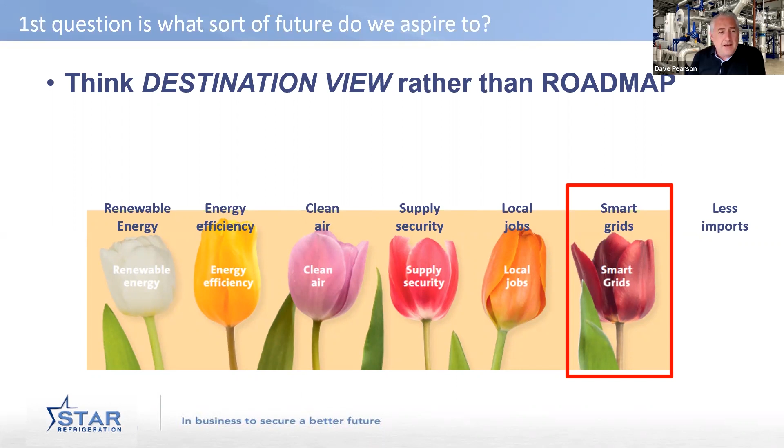But that's the challenge of how to bring this technique into all these different places. And clearly, one of the key things we want to do is do it as cost effectively as possible. You can do anything well or badly, as the case may be.

Sorry, the clicking is just going a little bit slow here.

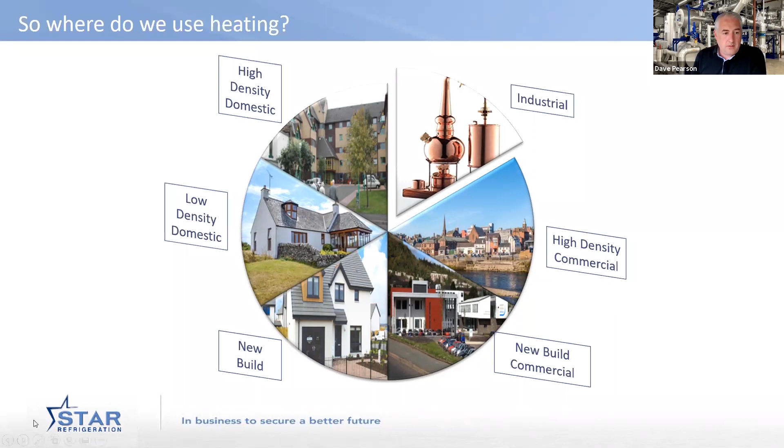Here we go. So some folk have heard of heat pumps. I've got this in the style of Vic Reeves' statistic that 50% of the world have heard of heat pumps, and 50% have heard that they don't work very well. But that's something that we're trying to dispel. Taking a very simple one, and this just is really there to demonstrate that policy is at the core of the challenge and the opportunity.

So Star's bit, though, is very different from that. We're not in domestic heat pumps. I happen to have one in my house, but that's just because I'm a bit of a heat pump geek. And it's, I have to say, running very well. But our business got into heat pumps around about 2008, 2009.

Some clients approached us and said, we're thinking of doing this project in Norway for district heating. And my first comment was, what's district heating? I'd never heard of it, to be perfectly honest. So we got involved in it. We realized that if we used ammonia as the working fluid, we outgunned the competition using cousins of CFCs, basically, by about 25%. So this client is now buying 25% less electricity because they used an ammonia heat pump.

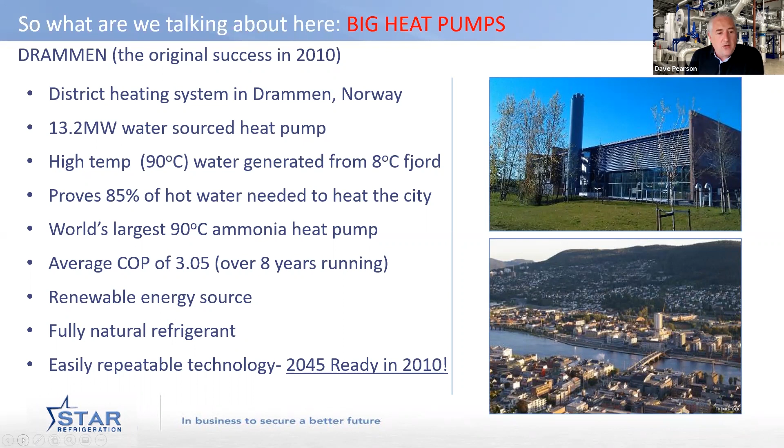We also had the challenge of getting up to a fairly high temperature. And this was the first 90-degree heat pump in the world. It's still the largest 90-degree heat pump even 10 years later. And that says lots of things. A, it was good, and B, gosh, it's quite difficult to repeat success. So it's taken us a while, but we have moved forward and much closer to home.

West Dunbartonshire Council and the area of Clydebank. This is the former John Brown shipyard area that's being redeveloped over the next few years, but they have deployed effectively something similar to Drammen. We're taking the heat from the River Clyde and raising that up to 80 degrees and delivering heat into the district heating network that will feed the entire area.

The buildings will not be served with gas, I don't think, and they'll be getting their heat from that. But you know, why bother? Well, when I put this slide together, I said it's roughly about 45% of the carbon footprint of gas.

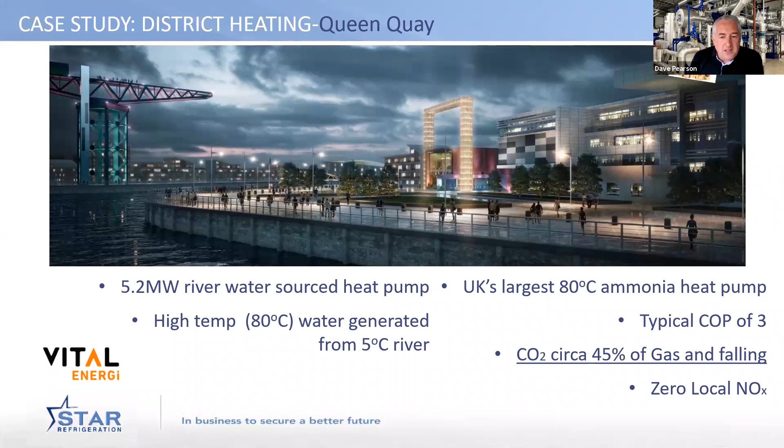Actually, on some days it can be 2%, because obviously the Scottish grid is incredibly decarbonised. And so the site is built. This is quite an old photo, actually. I should pop down and get some nice new ones, because it's all been landscaped. It's a lovely plaza.

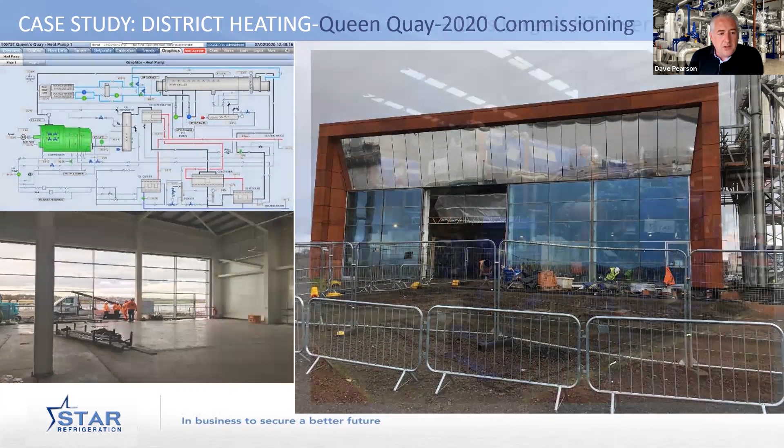The lower left corner, sorry, is before the heat pumps even went into the facility, and there's space for 4 heat pumps, and 2 have been installed. So these are what I affectionately call the twins. I kind of felt we were rearing them in the factory in Thornliebank in Glasgow, and then they were passed over to their new owners, and we're very proud that that's happened.

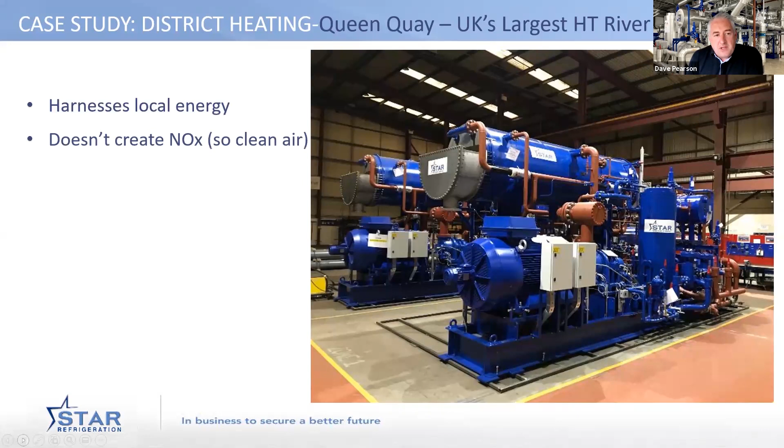And Vital Energi are the main contractor on the site, and did a brilliant job of quite literally picking these up and taking them and deploying them. And the key thing about the district heating is the other bits, and really it's the other bits I want to talk about today. But these particular ones, there is no NOx emissions, because they're not burning anything. Obviously created local jobs. The key thing, and this is really the pertinence of today, it actually allows more wind generation on the grid, because we have a very flexible consumer.

In the foreground of this photo, you can see the electric motor. These are each 800 kilowatts of electric motors. Now that in one sense is a challenge, because it's a big electrical cable and it's a big load. But in the other sense, it's a huge opportunity, because we can switch the heat pumps off in less than a second. And that's the bit I'll come on to in a bit more detail.

We haven't as yet harnessed the cooling effect, but these heat pumps are cooling down river water, and that is not being used. We're only keeping the heat from the river water that's boosted up to 80 degrees. So perhaps at some point somebody will ask for some cooling on the site. We can flex around the time of use and aim for the cheapest tariff. And once things settle down in site, that's, I'm sure, something that they'll be looking at. But as I said, we're delivering 3 units of heat for every 1 unit of electricity.

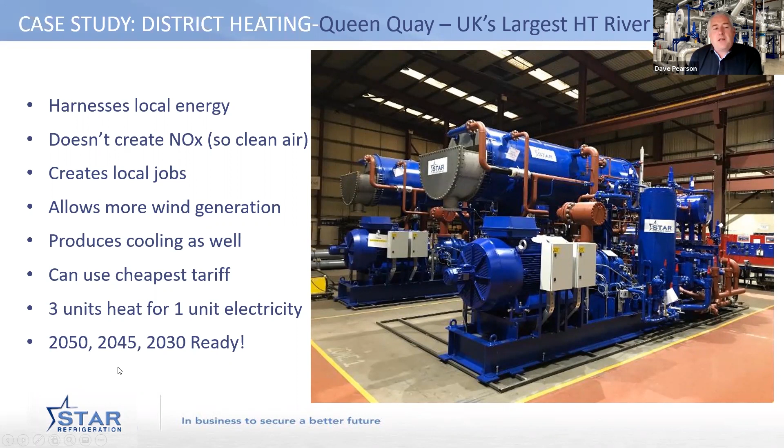And depending what date you take, and there's a real cluster of dates being thrown around, but these units are 2050 ready, if that's the date you're picking. Or in Scotland, of course, we've got targets for 2045, or various cities now are saying we need to be 2030 ready. We will not have to go back and revisit these and run them on a different fuel, or make them do something different. We are producing heat that is 2030 ready, and that started tail end of last year. So 10 years ahead of schedule, so well done to them.

So the key bit about this is energy storage, and there's some brilliant guys in this industry, very inspired by Henrik Lund and his colleagues, in particular David Connolly and Brian Vad Mathiesen. But if you're interested in any form of energy storage, look them up. They're in Aalborg University in Denmark. I learned a lot from them over the years. And one of the things we learned was that energy storage is incredibly important. And you can do it different ways.

You might have a Tesla battery, and that's great, but you can see in the left-hand column, the y-axis, the cost. Or you might have a large-scale battery facility, and that's great, but it costs that much. Or a variety of others. Closer to home, pumped hydro is clearly a technique that we know in Scotland. But what the guys in Aalborg are saying is, actually, if you're going to turn that electricity into heat anyway, storing it as heat is a far better way of doing it.

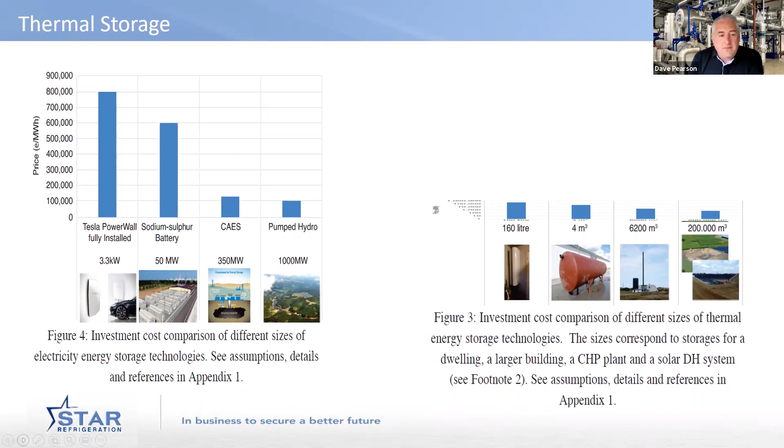So at a very domestic level, a small tank in a house will cost you this much. A larger tank will cost you that much, and it's cheaper. And then the sort of centralized district heating, and even in Denmark some of the cities now have effectively a football pitch sized thermal store. We don't have that in Clydebank as yet, but if I put these to the same scale, of course, that's the comparative cost. So you can see it's very, very much cheaper to store heat as a thermal component, a thermal vector, than storing as electricity.

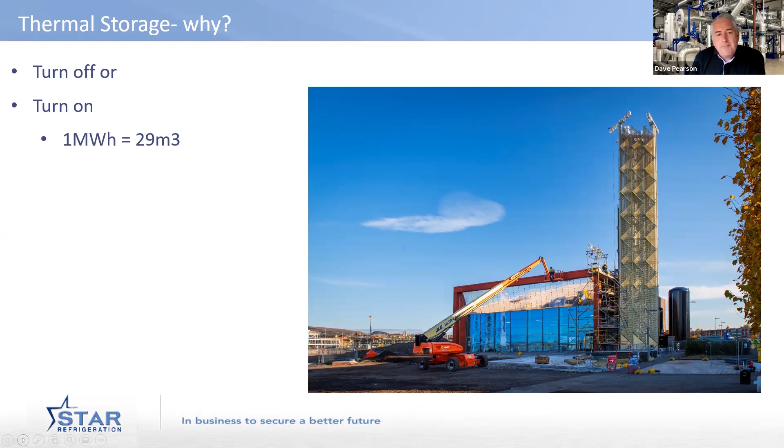So thermal storage, why is the question? Well, we can forcibly turn on the heat pumps, even if we don't need heat, and store the heat. Or we can forcibly turn them off. If we've already got a thermal store, we can turn the heat pumps off and save it. But just how valuable is that? Well, 1 megawatt hour of heat storage needs 29 cubic meters. 1 kilowatt hour is 29 liters, therefore, and 1 cubic meter gives us 11.5 kilowatt hours of electricity that we can switch on or switch off.

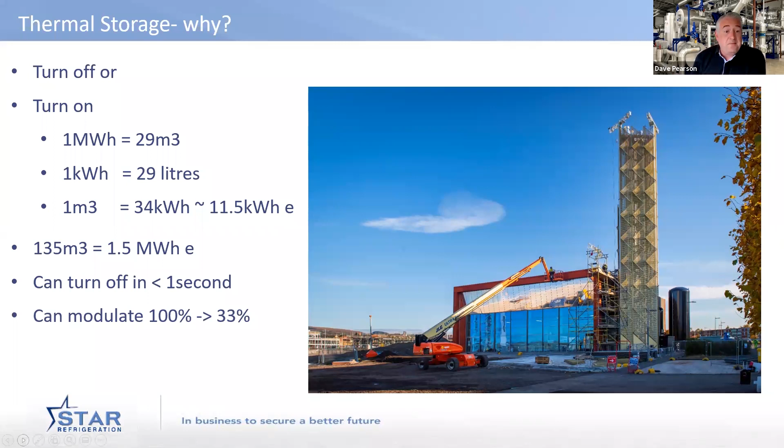And we have 135 cubic meters in that tank. You can see, much like the Father Ted sketch of these ones are small and those ones are far away. That tank is absolutely gigantic, but quite far away. So that's giving us 1.5 megawatt hours of electrical switching that we can enact when we choose. As I said earlier, we can turn it off in less than a second. And we can also control the demand output and trim down to about 33% capacity.

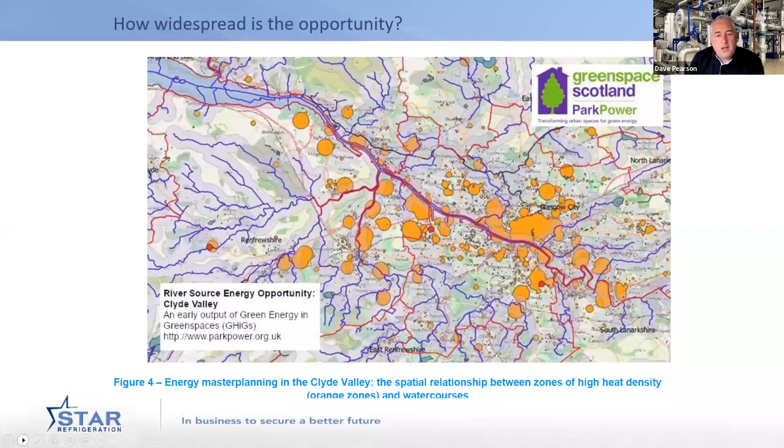So is this just a freak case? You know, we're only ever going to see one of these systems in Scotland. Well, that's a policy decision. It's down to whether we create the right political environment and the policy. And there's some really good stuff coming through that's picking up on this success and going forwards. But what about the technical aspects? Well, this is some really good work done by Greenspace Scotland and Park Power, basically showing clusters of heat demand and the proximity to water, and where these could be picked up and delivered, and effectively cousins of Queen Quay created.

We did some work under the banner of Heat Vision 2030 for the centre of Glasgow, and basically said, if we create heat networks with 4 heat pumps, a bit like the Twins, then could we create district heating across the centre of Glasgow? And the short answer is absolutely yes. The technology is 100% proven. What we need is a commercial platform in which to do that. And that's why the private wire is so incredibly important in this, and also the flexibility.

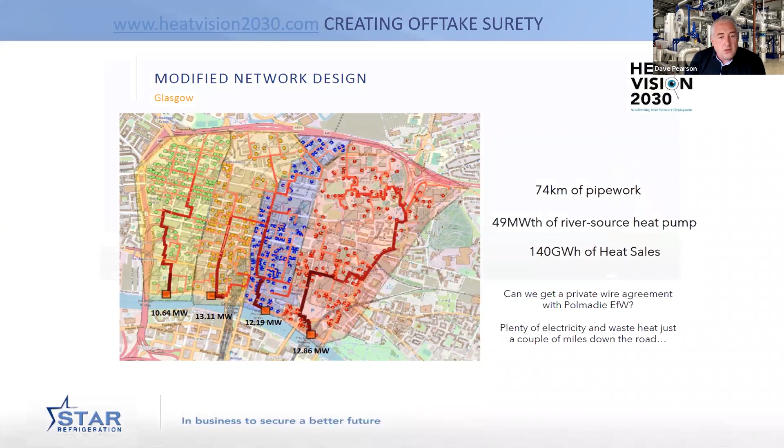So with that, and as intro to the next speaker, Alastair, and to try and big him up, really what I'm saying is, in the words of that other philosopher of our modern time, Norman Cook, heat, flex, save, repeat. So Alastair, I'll pass over to you.

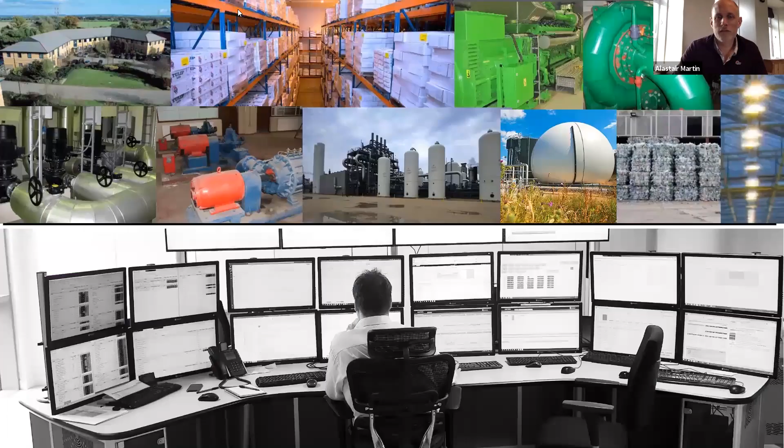Thank you very much. I've never seen anybody bring Fatboy Slim and a log scale graph into the same presentation, so that's an achievement. Thank you for that. And Andrew, I think you're going to advance the slides for me.

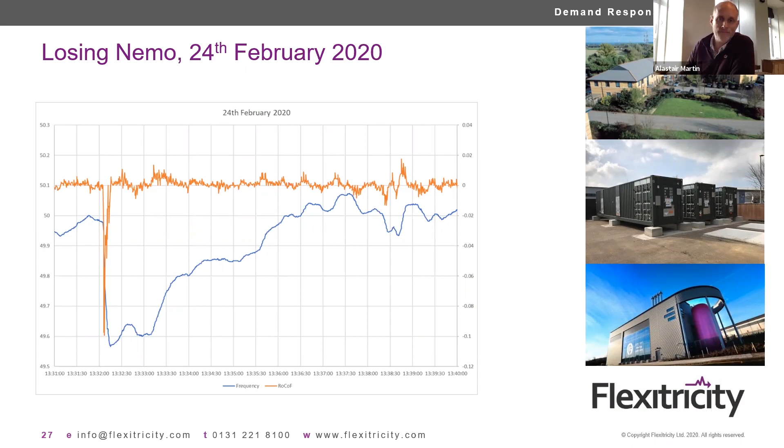These events still occur, but with the grid greening up, the demand side has new duties on top, and that's balancing the natural ebbs and flows of renewable electricity. And here, much of what happens more slowly over minutes and hours. And it's not all about shortfall. During the Beast from the East, we saw about 28% of GB electricity coming from wind. And solar can do well as well, even in winter.

These graphs are all from a recent bunch of Christmas days, showing solar output in those times. And the highest of the lot is higher in output than Hinkley C nuclear power station will be able to produce when it's commissioned. So renewables can be very high. These are situations when demand is also fairly high, but renewables can be high when demand is low. And they can also vary. So other times there is less renewable energy available.

These changes have a large effect on electricity prices. Now, I'm not talking about tariffs there. I'm talking about the wholesale and the spot markets and the balancing mechanism, the markets that underlie the tariff prices. So prices change a lot. And the closer to real time you are or able to act, the more certain you can be about whether a price is high or low and whether or not you can respond to that and capture the value of it.

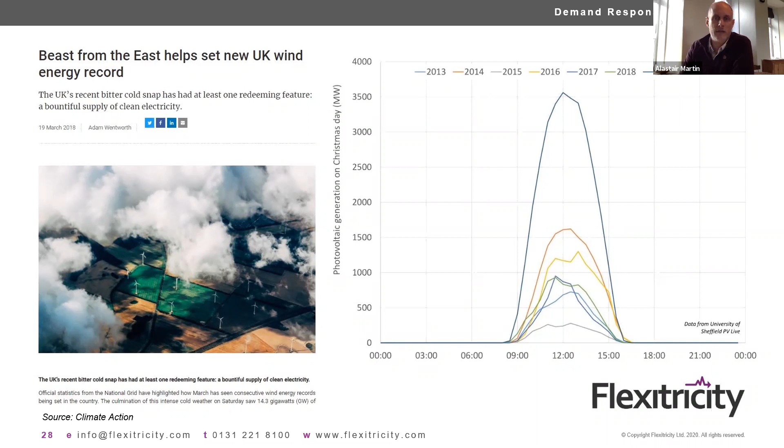There's another point, which is that it is often windy in Scotland. And there's a lot of solar generation across southern England and South Wales. And sometimes the networks can't carry everything that we want to flow. So some of it gets wasted, and that's expensive. And all of that, if you can jump a slide, has profound implications for heat.

As Dave has said, heat can be stored far more cheaply than electricity, and it's usually much better at handling short variations in feed and supply. So the pictures here are all of well-known CHP schemes. And I'm not going to speculate on what the individual plans of the operators of these schemes may be, but we all know what decarbonisation means for most heat networks. And that is a move to large-scale heat pumps.

So if you're in the business of turning electricity into heat, the call to you from me is to recognise the value in the way that you do that by operating flexibly. All heat networks have some inertia, most have heat storage, some have a lot, and all of that has value. Some of the things that electricity wants from flexibility are technically challenging, and some are subject to strict rules, or they're just really fast. But not everything is like that.

I sometimes come across energy managers and other energy professionals who have heard one particular demand flexibility pitch. They have determined that their assets can't do that particular pitch, and they've abandoned the whole idea. Now we want to avoid that sort of missed opportunity. So the way I think most heat pumps should operate is on the next slide.

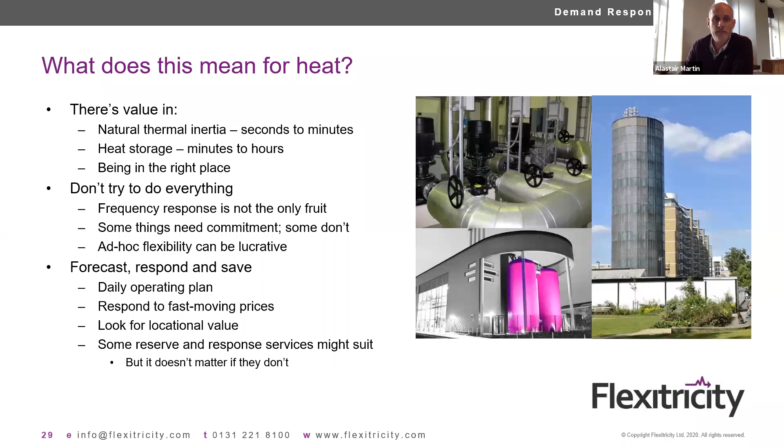It starts with capacity, the capacity to consume electricity or to not consume, an appraisal of whether or not any of the contracted balancing services like frequency response or reserve could be offered, and if so, how much and when. And that generally means a commitment of some kind from 1 to 30 days ahead.

Then it's all about setting up the daily operating plan with a mixture of forward or curve trades and day-ahead auctions. This then sets up what the heat pump is intending to do if nothing else changes. But this can be changed right up to real time through the intraday markets and the balancing mechanism, as you see on the right, as we vary the schedule to suit the change in prices and the needs of electricity.

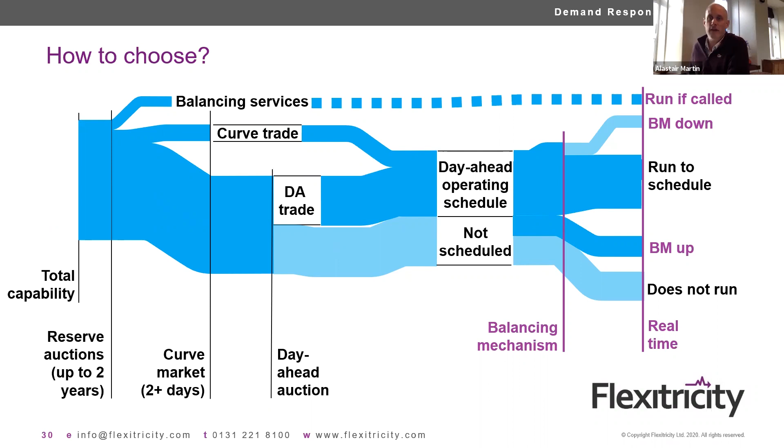And that is where much of the value of flexibility is created. So the next slide shows the balancing mechanism. We're going to show a couple of example periods in the balancing mechanism. In the balancing mechanism, anyone who signed up to it can trade, but they can only trade with National Grid. National Grid is the counterparty.

And the BM, the balancing mechanism, is split into the bid stack on the left, that's people willing to buy energy, and the offer stack on the right, people willing to sell it. And selling can mean turning down consumption. So the green ones here are BM trades, or BOAs, as they're called, which were made in that half hour. Some of ours are circled, and one at least of those is a district energy scheme.

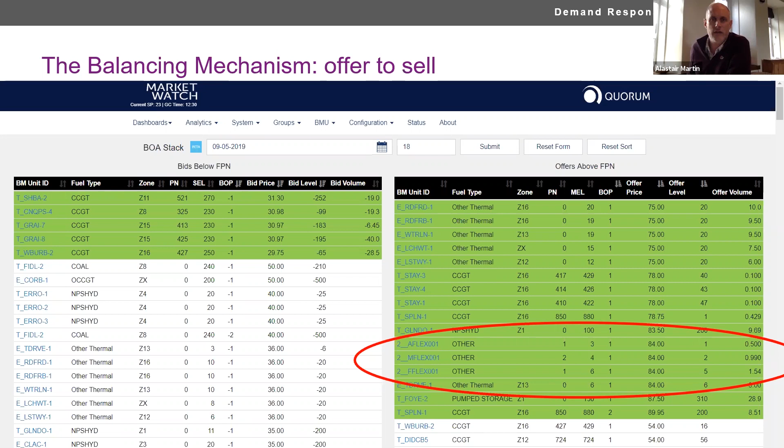Next slide shows the opposite. So another period when Grid was trying to get rid of energy. The circled trades are actually our customers getting paid to stop generating. And in fact, in there is district energy that's getting paid essentially to rely on its heat storage. That's a great moment, clearly, to start a heat pump.

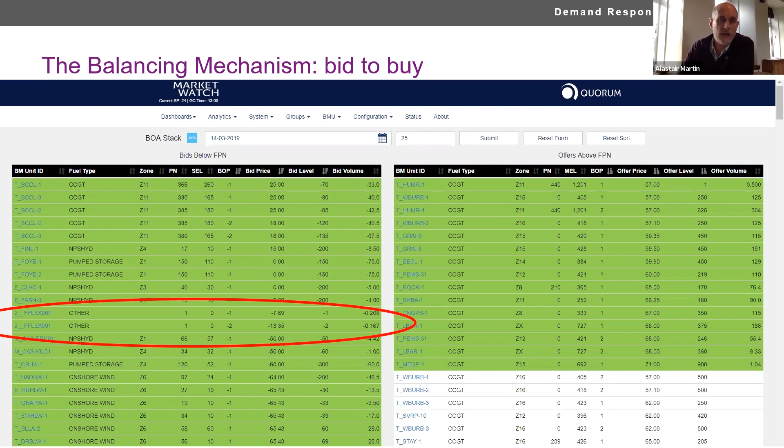But the BM also carries a true locational element, which most electricity markets don't. So if you're near the renewable generators and the transmission network is highly loaded, you will get called out of the regular price order. This is one such period. The green list on the left goes way off the page, with ever increasing negative prices achieved, in this case, mainly by wind farms in Scotland. So I'm a great believer in putting green energy to work, and I want to see heat pumps soaking up that energy. Next slide, Andrew.

So these markets, the BM in particular, they can be very active. The BM sees thousands of trades each day. This shows 1 day of CHP activity in district energy. The red line is what the energy centre planned to do. The black lines show extra energy bought in the balancing mechanism, all of which are within the limits of the site, which are the blue lines, and those limits can change operationally at any time. And every day is different. Some are quiet, some are busy. It all depends on the day and on the plant itself.

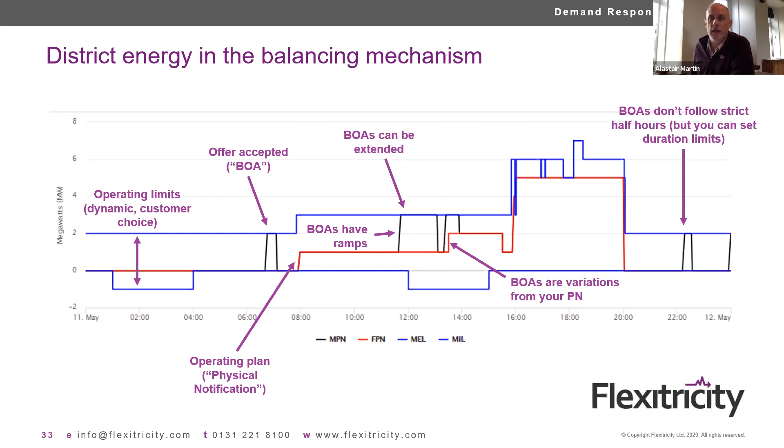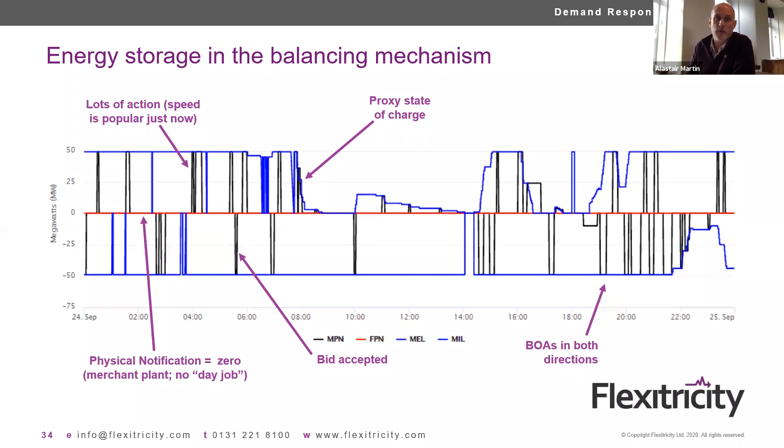What we're doing is moving electricity around in time. We're responding to events and to opportunities, all within the constraint of the heat network itself. Optimization means meeting heat demand at lowest cost, and that means we'll be using green energy to warm people's homes, and that is what we're for.

But many of the markets, the balancing mechanism, intraday, day ahead, they require an electricity supply license to access. So we've been a licensed supplier for 3 years now, concentrating on flexible business customers. Some of these things are now offered by other suppliers, but it's not the norm. Most electricity users aren't thinking about flexibility, so most suppliers don't concentrate on flexibility.

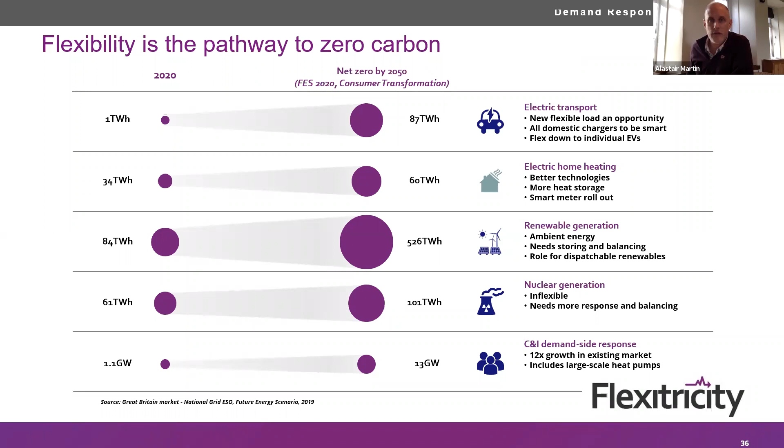And that is the point at which I will stop and hand over, I think, to Roddy. Thanks, Alastair. I'm Roddy Yarr from University of Strathclyde. Thanks for having me along this morning. I'm going to give you a perspective from, I suppose, a university point of view, but also as a user perspective as we move towards a net zero position, or do our best to get towards that position.

Hopefully I can move the slides on myself, or perhaps could you move it on, Andrew? I've handed control over, so hopefully if you're able to click on the screen, you should be able to move on to the next slide. Okay. I'll move on here, but not. There we go. So yeah, hopefully I did that and not you, Andrew, but let's see how we go.

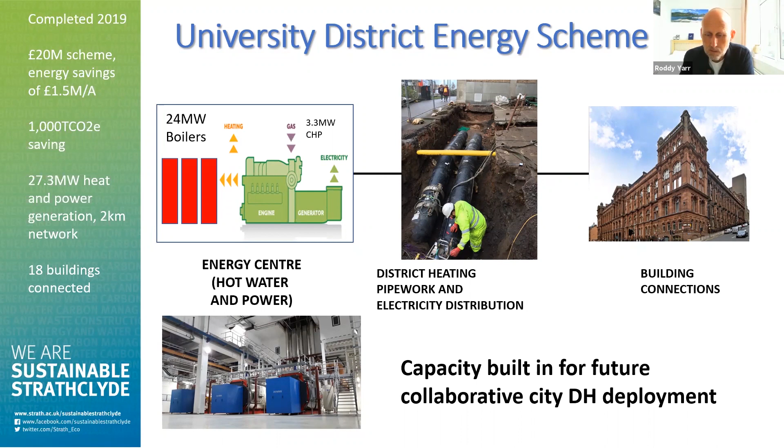But our trajectory is very much now moving away from gas and onto other more sustainable energy systems. So that's the direction of travel. But I think the important point is we have a network in place that we can use to connect into a wider district heating scheme for the city. We future-proofed the network so we can pump more water through it. We have a thermal store as well. We could have more thermal stores, to David's point earlier, which is important. I'm trying to move forward again.

So what are we doing now? I think our approach really is to reduce our demand side. So get our buildings in a much more efficient place so they can accept heat at lower temperatures. They're much more efficient in their fabric, and that's standard practice. But it's something that we have to do, and lots of our university peers are on this journey with us to decarbonise their existing estate. And we have 37 buildings across our assets across the central belt of Scotland. In an agile world, now we're looking at space utilisation, how we make our estate much more efficient in that sense.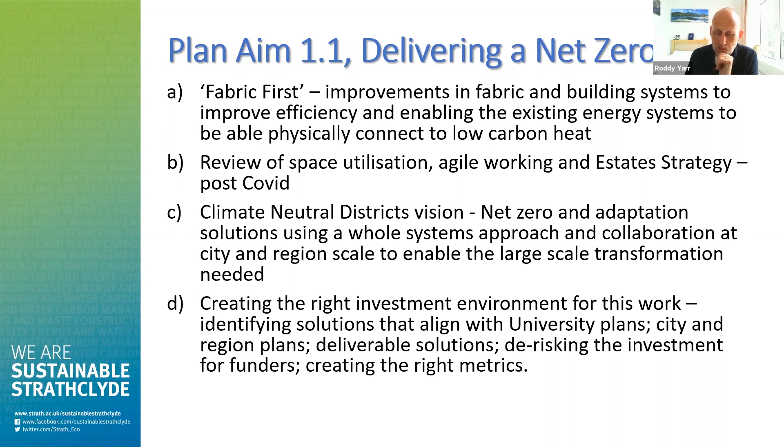But also we need to think of different ways to do what we need to do to get to a net zero position that's also climate resilient. I think that's important to think about as well. And our approach here is a whole systems approach. It's at-scale collaboration with city partners because we can't do this on our own. And we need investment to get into this space. And what we do has to be deliverable and has to be de-risked so that investors, private and public, will be able to make this transition happen.

So yeah, we're doing a piece of work now, just about to appoint a consultancy team to do a lot of work around our existing estate, look at the technical options available to us to get the demand side down from some of our buildings. And if you've been to Strathclyde University, you'll recognise some of the buildings in the diagram here.

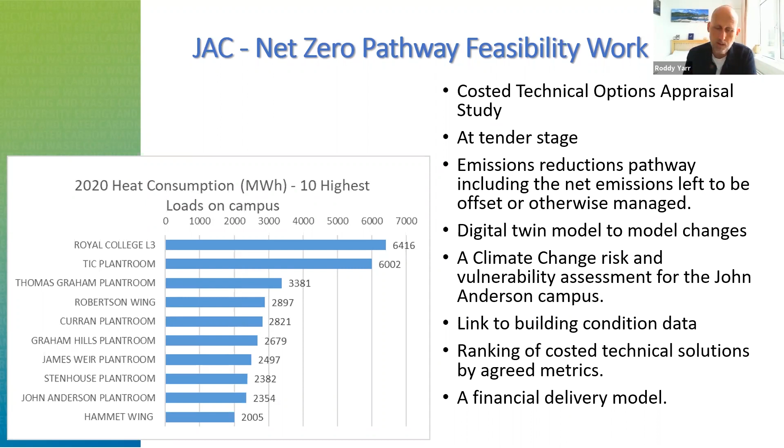So we're strong in that piece in terms of knowing that we need to do a lot of work to get the answers to what we need to do, to rank the costings of those and to make them deliverable and keep the university operating, because obviously we can't close the university down. We have to keep doing this work and keep students and research going, keep that teaching model going, and it has to be deliverable as well.

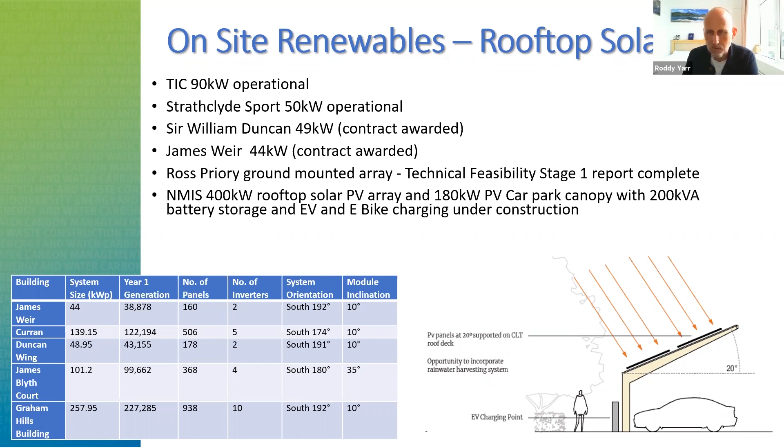So yeah, we're installing lots of on-site renewables. Several projects have just finished over the past week or two. The James Weir now has solar on top of it. The Sir William Duncan, the business school, we've already got some in place. And our new National Manufacturing Institute down at the airport, which is coming out of the ground, is going to have solar PV at scale on top of its roof and in the car park. So we're trying to do our bit there to make our estate work for us a bit better.

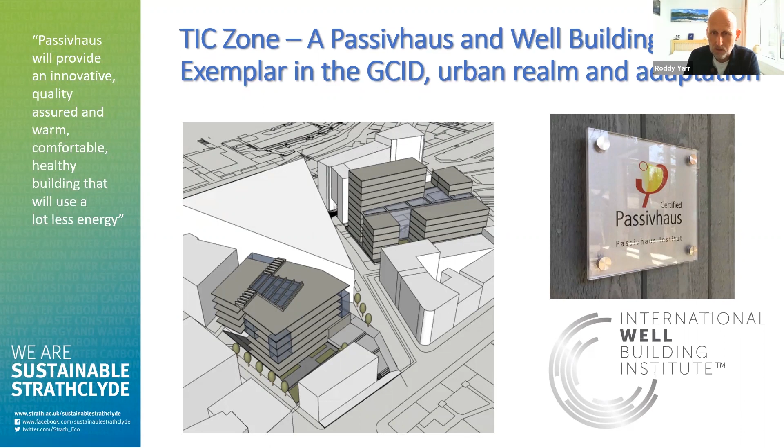Any new build will be passive in its design. So the new TIC building that we're planning at stage 3 RIBA design will be Passivhaus, ideally Passivhaus plus, and will also be WELL Building certified, and will be adapted to the changing climate as climate change is locked in to some degree. So that's our kind of direction of travel. We will be making all of our buildings much more energy efficient from the get-go, and our design teams are helping us to do that.

We also think about embodied carbon, so we are trying to reuse as many of our buildings as we can rather than build from new. So again, that's an important point, but perhaps not so relevant to today's discussion.

So yeah, collaborating, that's a really important point for us. We get the fact we can't do this on our own, and we are collaborating at scale to help that endeavour. So one of our examples of that is the work that we're doing down at the National Manufacturing Institute, where we are doing our first energy carbon neutral in operation building at the new institute that's coming out of the ground. As I said before, there'll be no connection to the gas grid.

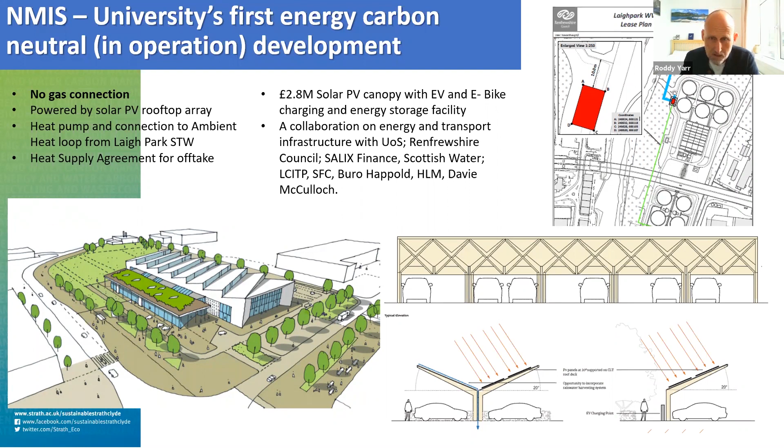That will be heated and powered using renewables, heat from the sewage works, working with Renfrewshire Council's ambient heat loop from Laigh Park sewage treatment works, and we're the anchor load for that development. So we've put our hand up to help that transition to happen, along with the Medical Manufacturing Innovation Centre next door, which is also planned, and also the electrical side using solar PV with battery storage as well. So a collaboration, I guess, which is under construction. So this is again an exciting time for us as we deliver that new institute.

So our kind of place in that is to create a bit of a thought piece around how can we transition that district as an exemplar that's replicable across the rest of the city, and show that we can do this, we can enable this to happen, and think about all of the aspects that we need to think about in that transition. Infrastructure, integrating within existing city plans, de-risking the investment, but signalling the pipeline of opportunity around this space, and thinking about where low carbon heat and power can play into that, and using waste heat as well where possible.